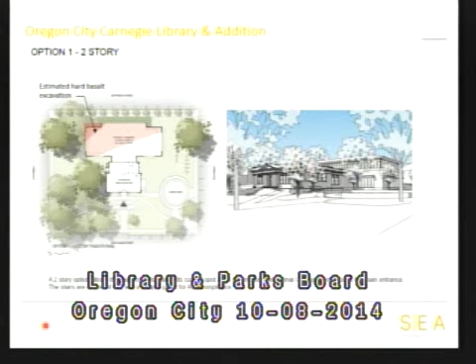If you back up to that very first one, I forgot to mention that with that one, we were really looking at having the primary entry through the existing Carnegie. So that would entail making that front entry ADA accessible with a ramp, new stairs, and would need to develop the front area.

Looking at option 3, a simple bar building on the back of the Carnegie. All of these, as we've talked about, could either reuse the existing Carnegie entry or create a new entry. The last 2 include a new entry off of 6th, something that would engage with the spray park and the play area there, and you can see the amount of basalt that one gets into.

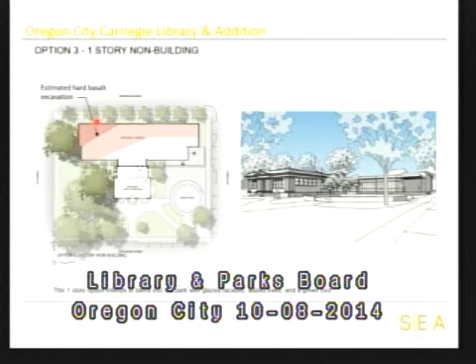You can see right in here, because you're starting to eat into that northeast corner. And then with the one story, that gets to be almost an accessible roof, because it gets dug into the hillside. So it would, unless you really build the walls taller, be pretty much buried on the northeast.

Option 4, one-story wrap. This was spreading the building out, wrapping it around towards the south side, towards 6th Street. You can see the amount of excavation we would get into. As Maureen was talking about, this was the option that the library board had recommended.

Option 4.2, this is the wrap idea, but turning it to the 7th Street side. You can see we get into both the tree canopy and also the real excavation area up on the northeast corner of the site. This initially started with the idea of how we could preserve the existing play area, which has also been a big part of the discussion as we've went along with the design.

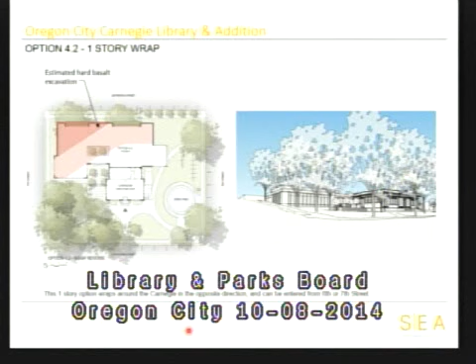Option 5, going underground, and you can see we would be into basalt throughout the full range of the addition there. Note too that even though we go underground, this would be kind of the 15,000 square foot footprint. The idea is that you could potentially put a water feature back on top - you'd basically have an earth roof, about as robust a green roof as you could get.

But you would still have to have stairs and skylights to let natural light into the library below, as well as egress stairs. We put it over here, still trying to maintain that front axial entrance, historical entrance to the Carnegie. Just as a side note, with this going this direction, we'd estimate we'd probably need to go down about 20 feet in order to build this underground, and there would be items protruding up - light sources, stairs, that kind of thing.

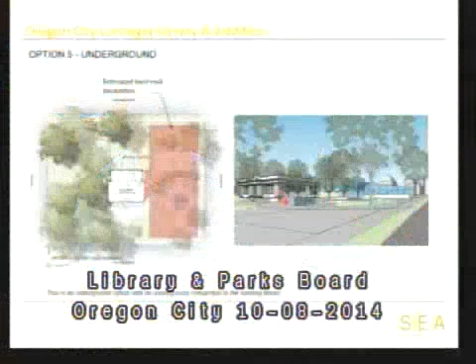Here was the idea of having these planters around a new water feature, and that could be a clerestory that allows light down into the lower level of the library.

We went and did the exercise documenting the process and going through the pros and cons we heard from the library board, the building committee, and the neighborhood meetings. We just tried to document everything. This was presented to the McLoughlin last week, giving them an update on who we met with, what was presented, and what was concluded, to keep communication clear. Then there are quick studies on the fill, cut, and potential excavation.

This is a tally sheet put together with all the options matrix listed above. Let me get my pointer working here.

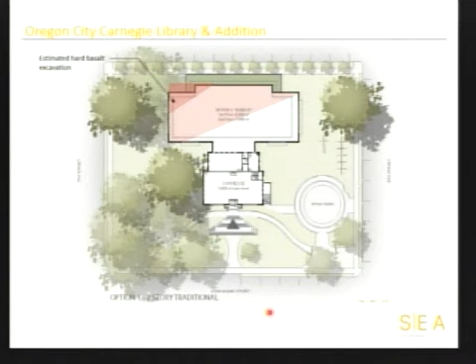Looking at option number 1, this shows the basalt area that would require excavation. It has the main entry through the front of the Carnegie, with ramping and stairs in front. It would maintain the play area as it currently is, and also preserve a fair amount of the canopy. Here's a quick perspective view.

For the second part of the option, we were asked to look at creating a 6th Street entry. This shows not using the existing Carnegie as the primary entry, so it would not require putting ramps and stairs in front of it, and instead puts the entry on the 6th Street side. In the rendering, you can see it would create a plaza on that side and a new entry coming in off 6th Street, which would also connect to the John Adams.

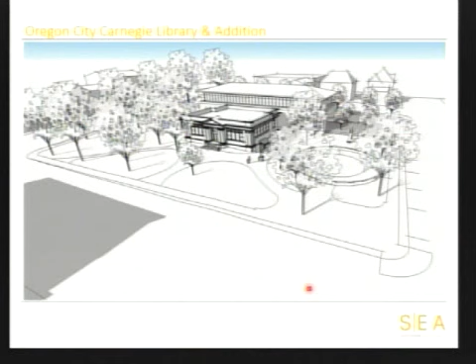Then looking at option number 4, you can see how the excavation is impacted there. The other part was looking at the potential for revamping the play area in front and reutilizing that space into something perhaps different in terms of the play area.

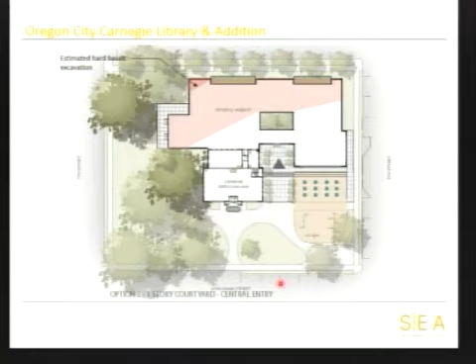This would keep the entry into the new piece of the project, creating a plaza, combining the plaza and play area together. It would continue to have a spray park and a play area, with the ability to potentially create a fountain that could, off-season, act like an amphitheater or stadium steps for congregating, but more integrated into the architecture. Here's what it could possibly look like.

We need to put 'artist rendition' on here, since that's always kind of loose. But the idea is to really activate that front area and create something that engages with a new entry to the library.

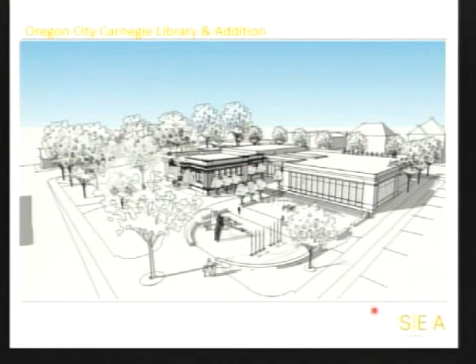The concluding slide is really just reinforcing selecting a single scheme to move forward with on October 15th when we meet with the city commissioners, because we're working towards a historic review board package by the end of December, as well as site design review, so we can break ground in the summer and not lose time. One of the things with the soil is it's very dense, silty clay, and if it gets wet, it's hard to manage. So it's much easier to open up the park and start excavation in early summer. We've got some timelines that we're trying to maintain.

So that concludes our presentation. Lots of information, but happy to go back through any of it. We wanted to give you an overview of the process and the things we've been talking about and looking at in terms of design.

Do you have any idea on the cost of removal of the hard basalt? Is that exponentially more than the loose basalt? The hard basalt will be far more expensive than the loose basalt. The loose basalt is essentially gravel, so that can be scooped out. The hard basalt, our anticipation would be that you'd be into blasting to loosen all that up.

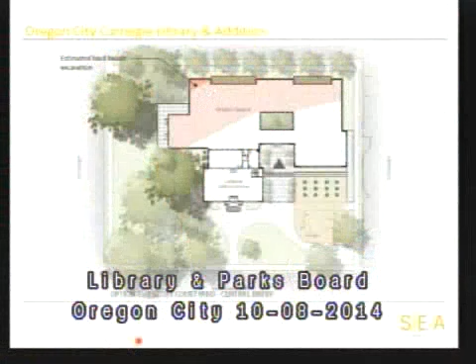And then you have the play area that's right at the corner. So not only could we try to get some really high slides like you have right now, swing sets, but maybe even add a couple more pieces of play equipment.

Okay. Other questions or comments? I'll get back to what you're saying about a place for the kids to play, for story time with chalk and stuff like that. There's this entry courtyard that could be used for that. I like it, except for all the people walking in and out of the building. Yeah.

Okay, thanks Kurt. Any more questions for the consultants who are here? Well, what do we do next? Recommend public input. Scott, does the Parks and Recreation Advisory Committee need to take a vote on our favorite plans? I think the first thing we need to do is we need to hear from the public. Yeah, I'd like to do that next.

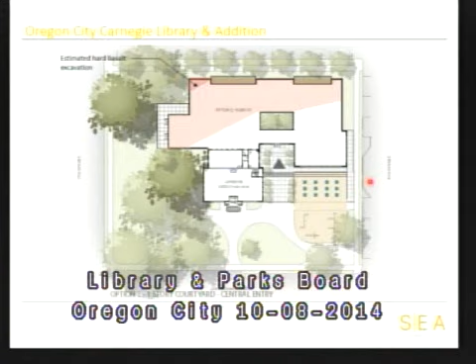And then you could also come in from the 6th Street side, with a drop off on that side. There could either be an entry over there or a covered walkway that would bring you in. That's what I was referring to, the 6th Street entry. That's still a bit of a way for an elderly person to walk. But you weren't showing the covered part, so I guess that would make some difference.

Yeah, we would anticipate that there would be some kind of cover that would come out, and also the idea of creating a cover along that area so that you'd be under cover as soon as you hit the building, basically. Thank you.

Can you go to the underground? I just wanted to point out a couple things there. Let's see, where are we? I think I have to go back. So as I was just saying, what we'd be looking at is—hey, that's pretty cool, I can move that—up in here we'd be excavating probably 22, 24 feet down, I'm guessing. In the center here, 7.

And it's certainly possible that out here we wouldn't be in anything, or there's probably something, but obviously it would be a lot shallower. If you were going to go underground, I think it's an interesting idea to do it across the front, because clearly that would be the lowest impact in terms of the basalt. From an architectural standpoint, you'd really have to think about how you'd maintain the entry through the Carnegie across that building underground. But again, very possible.

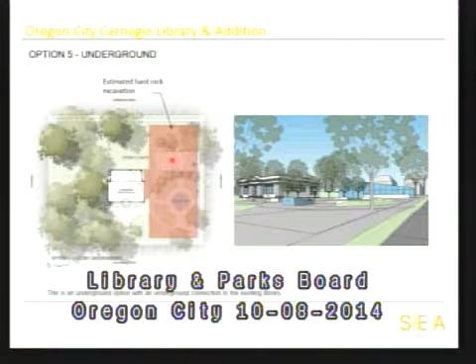How large is the one that's on here now? Oh, it's probably a couple thousand feet. Yeah, 30 by 80, something like that. I mean, if you did go underground, with preservation of the park area and reutilizing the Carnegie, you'd have to really modify one of the two rooms to kind of create a gracious, accommodating entry.

Looking at this, it doesn't seem like you preserved any of the park space you talked about earlier. In the underground option, in the one on the screen, that space I asked about, it looks like it encroaches upon the park space, does it not? Yes. So the idea is that since it's still a structure, you're going to be limited to what you can put on top of it. Even the underground doesn't preserve the park space. That was just my comment.

I think, if you did go that way, that's where Sid's saying you would really try to minimize the intrusions, but you still have to get natural light. Yeah, you've got to have light. And these are some wonderful examples that they presented, and I've been to some of them. They are wonderful, but like I said, we wouldn't have gone this way if we didn't think there was a way to do this. It's a matter of how feasible it is, and ultimately I think there's a real cost impact with it.

It didn't survive as an early option, though. No, right.

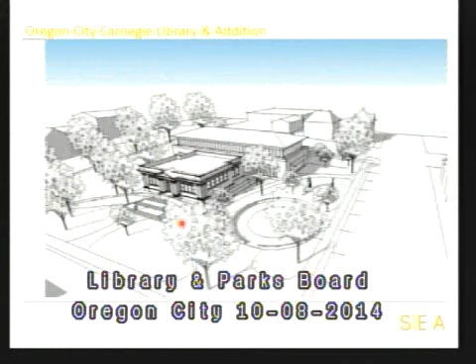I have a question. The McLoughlin neighborhood's second choice was option 1, 2-story with a 6th Street entrance. Okay, so we don't have any slides that represent that. We do, yes. I didn't see one on my thing, so I was looking. It's right here. This is like a big menu kind of project, we just dial up any of the options.

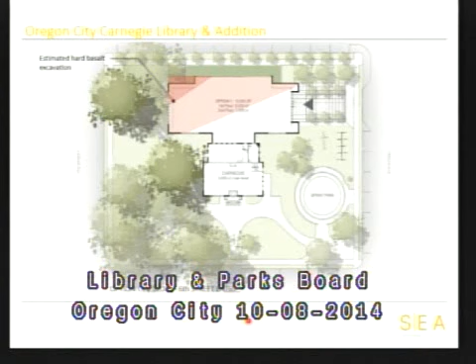So this one represents the 2-story, symmetrical idea, right behind the Carnegie, with the entry off of 6th. Do you have any side view renderings of what that would look like? You do have that rendering there. Okay, we saw that at our meeting. And it preserves the original front.

That's the key, that's right. That was the key to this one, and that's how it actually started as an idea. It minimizes doing anything to the back wall of the Carnegie too, so we don't have to worry too much about seismic issues there. That's a point we didn't bring up tonight, but one I think we've probably all discussed at some point.

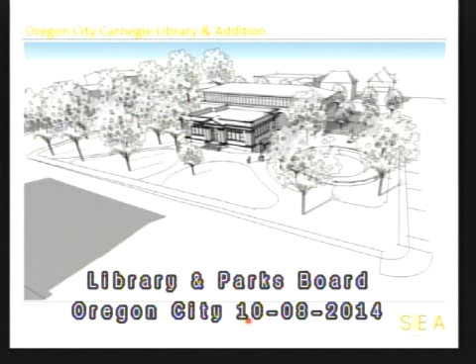The idea of what you'd have to do to the existing building to use it as the entry, and quite a bit of seismic work required there. We won't really know the answer to that. We know if we alter it what we have to do, but we won't really know the extent until we get into the actual library planning. All of these schemes have pros and cons, but all can be solved for the library to various levels of success.

Any more questions for the architects? For all the options, I'm saying that would be my favorite at this point. This option with the entry on 6th? Yeah, the 2-story option with the entry on 6th preserves most of the park space. As much as I would prefer the 1-story, the 1-story wrap does take up a lot of park space, and I'm starting to get uncomfortable with the courtyard.

I'm wondering if you all have questions for us as library board on why we chose and recommended what we chose. We'd love to hear there was a lot of thinking that came behind that, so want to ask a specific question?

So the library board chose the 1-story wrap with the entrance on 6th Street, or the entrance in between at the plaza. We looked at both the entrance on 6th Street and also the adjusted courtyard. A lot of our discussion centered around how a 1-story is more economically feasible in terms of staffing, and programmatically it could mean more for the community.